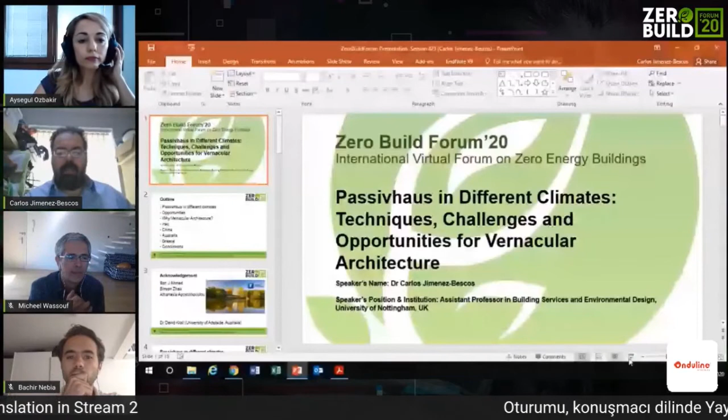Hi, thank you very much, and thank you for the invitation for the talk. So basically, I'm an assistant professor at the University of Nottingham, and this work is... let me redo the screen. Okay, so that should work better, hopefully.

Like I was saying, I'm an assistant professor in building services and environmental design. What I'm going to be showing you is talking about passive house in different climates, looking at the challenges and the opportunities that we can apply due to vernacular architecture. So to give an outline: we will talk about the different issues that could happen in different climates, what are the opportunities, why to focus on vernacular architecture, and I will talk about 3 projects that I work with in Iraq, in China and Australia, and in Greece.

Obviously this work is thanks to my students and a very good collaborator. So thank you to Bang, Binjan, and Nasia, and Dr. David Kroll at the University of Adelaide, with whom we worked together in UK and in Australia.

We understand that passive house has been very well developed in cold climates, in continental climates, and we all know about it and are very happy about how it works. But obviously now we are expanding more and more, looking into other climates. In the United Kingdom we get some issues with overheating, even though we don't have that much sunshine and heat. But suddenly we are moving to other places that are hot and humid, and there are different issues to deal with.

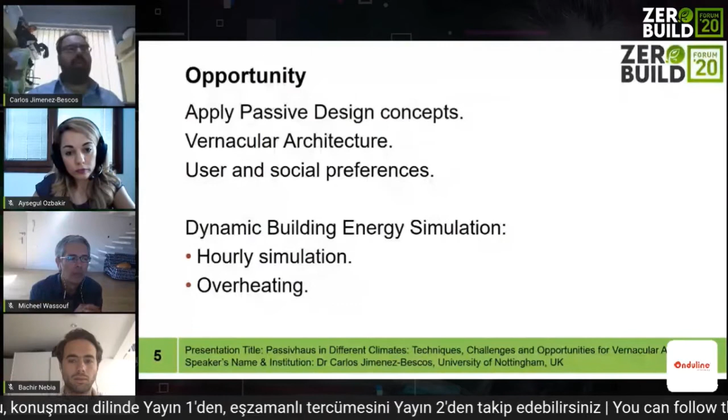The other opportunity that we get is actually moving from the kind of modeling that we do in PHPP, where we are based on monthly weather data and monthly energy, which, to be fair, is really accurate. But when we come into looking at issues of overheating, we need to have perhaps much more detail. And that's where using dynamic building energy simulation allows you to have hourly modeling, which we understand obviously is not for everybody, but it can open very good opportunities.

So why do vernacular architecture? Well, building has been around for thousands of years. We always had shelter, and they evolved through a process of trial and error. And this has been the way that a lot of the technologies we use nowadays came about. We learn from it, so there is quite an opportunity there to learn why things work and how we can apply it.

The other thing, obviously, is that it's quite environmentally friendly because we tend to use passive approaches. I mean, air conditioning is very much available now - perhaps 10 or 15 years ago it certainly wasn't the case in South Spain. And the other thing is that we get people to actually be able to enjoy better where they live because they have that cultural connection. So we start to talk quite a lot about what is a house and what is a home, and that kind of feeling that you can get.

So there are obviously quite a lot of examples in the literature, and as well, courtyard houses are found all across the world in different countries, and they tend to save energy. They tend to provide a different aspect that, more importantly, has a social value.

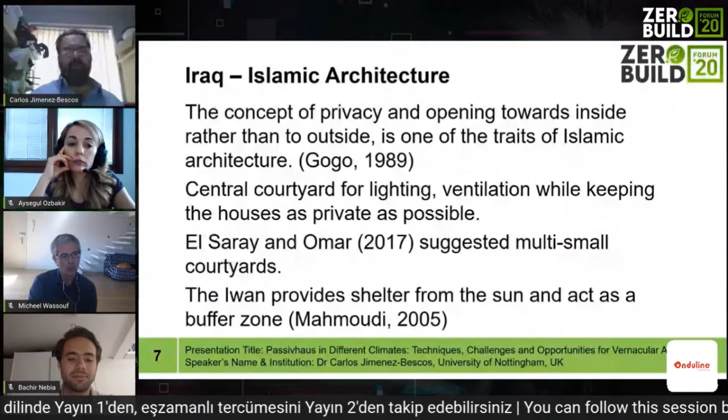So in this case, what we did is all the work was actually done through Design PH and PHPP, and we started to look at what kind of features of the Islamic architecture we could be actually implementing, and what kind of benefits we could be getting.

So we have a base model in which there was a small courtyard, and from that we start to input an Iwan and to be able to see, okay, what is going to be the difference. At the moment, we can see there is only one building, and this is some of the factors as well that we were taking into account, because in reality, this is actually based on houses in the Kurdistan area where you only have one facade that is external. So everything else, you are basically surrounded.

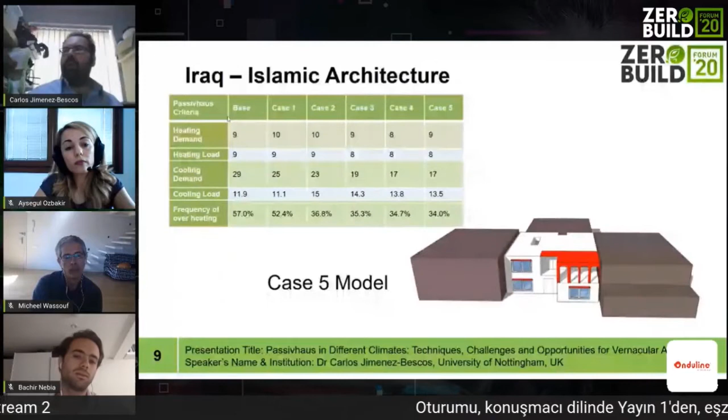So we can see from the results that we were doing, we have a base model and we have 5 different cases.

Obviously, we try to control the cooling load and the frequency of overheating. We are trying to get our cooling load below 15 for the Passivhaus standard, but our overheating was completely above the 10% that is expected. We can see some progression though—by getting shading with the Iwan and working with the courtyard, we managed to reduce it to closer values. Obviously there is more work to be done, but we are talking about initial stages.

Probably things to look at here are increasing the number of courtyards. So instead of just having one, even if small, perhaps placing them in different locations and seeing how we can create some ventilation. Obviously ventilation is great, but if you've got hot weather outside, there is nothing that's going to help you. So it's not a simple answer.

In terms of looking at China, we were looking at the Huizhou architecture. The use of vernacular architecture has already been used by Ouyang, not just for the culture, but actually for the thermal capacity that you could be using. What they were looking at as well is trying to implement some of the learning from vernacular architecture into the retrofitting of this building.

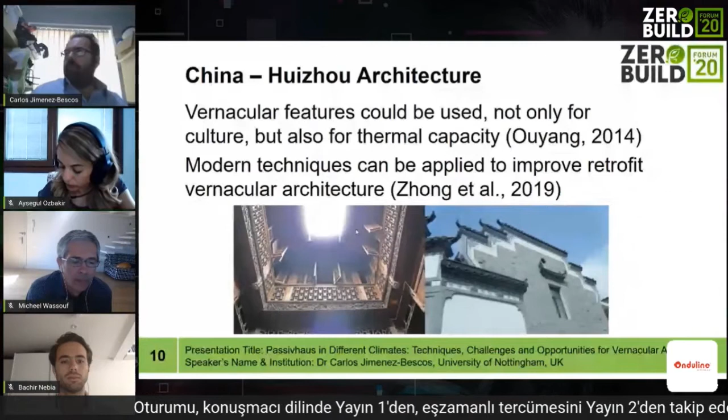In this case, there were four factors that we were looking into: the courtyards, the floor to ceiling height—probably this is more about the principle that if we look at vernacular architecture, we tend to have very high ceilings, because hot air normally rises. So that's the principle, to try to get the hot air to the top and be able to let it go out.

And the use of traditional materials—this has a lot of implications, more importantly from the point of view of embodied carbon. So it's a very sustainable way to try to use the materials that you are surrounded by.

The other factor is the wall finishing colors that we use. For example, in an area where we paint all the villages white, we always get the comment that they look beautiful, but it's not for being beautiful—it's actually to reflect the amount of solar gains that we normally get. So these are all small things that can add up to saving energy.

Here I will only show you some aspects of a comparison between a Model A, which would be a building according to current Chinese regulations, and a comparison to a building from vernacular architecture in the area. To be honest, there weren't so many changes.

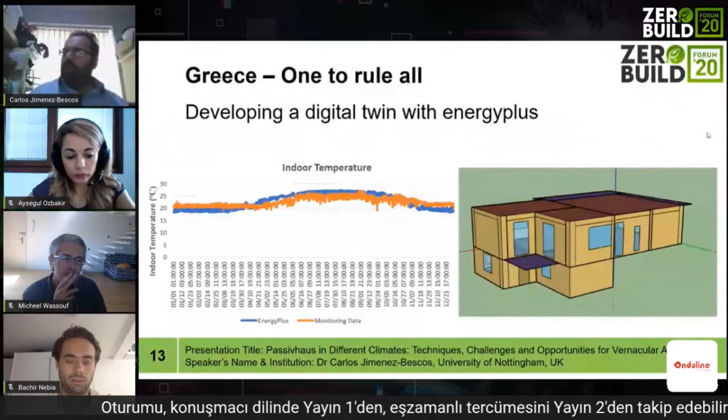So now we move to a different project. This is a Passivhaus in Greece, and this has been modeled using EnergyPlus, a dynamic building energy simulation software, based on hour to hour data. This brings a different approach. I hope most people will be familiar with the term digital twin—basically a digital twin is about creating a model in a computer, thinking about how it's going to be working in reality.

Well, as I was saying before, you build your building that hopefully is similar to what you model, but then you bring people, so the building is going to be used probably in a different way. So what we did in this case was actually closely work with the people that were using the building and really model the building according to the way that they were living.

On top of that, we were very lucky that there is actually monitoring data for this building. So what we have here is on the right-hand side, a representation of the modeling in Energy Plus. On the left-hand side is a graph comparing the red-orange line, the actual data hour by hour that was measured for the building, and the blue line that is our simulation. It's under 5%, which is really a good accuracy that we are getting. This allows us to do a lot of things.

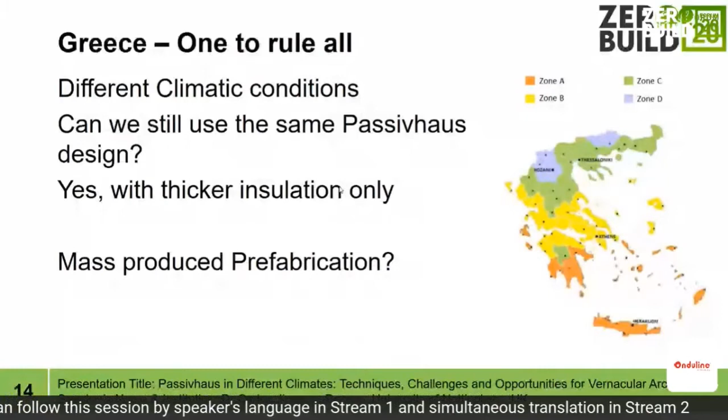And I think the final part that I would like to talk about is a little bit about a sociotechnical approach in Australia, where I worked with David Kroll and some colleagues. We were looking at trying to do affordable social housing that could be deployed for the masses, using a Passivhaus system. But if we go to Australia and try to put a compact form that would be perfect for the form factor, this is not going to work, because they don't live like that.

So we needed to actually implement how we can make a passive house design, that we can get it approved, but at the same time that people want to live there. And I think that's quite the point - we need to be designing places for people to live, not places just to be efficient.

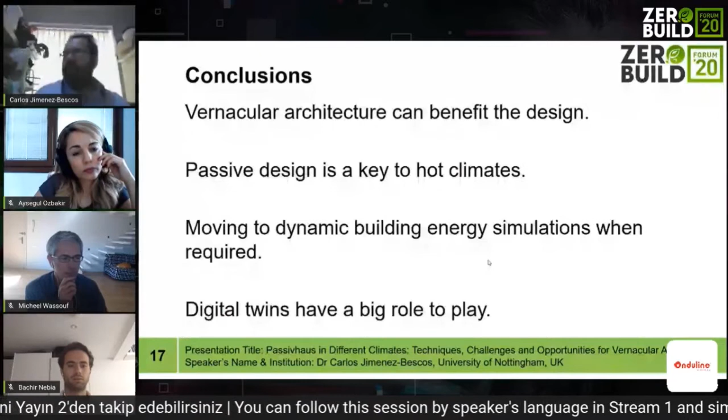Some references that I hope you can get from the presentation, if you want to take a look at some of those papers. And thank you so much.

Sorry, you are on mute. Your microphone is mute. Can you hear me now? Yeah, now it's okay? Yeah, perfect. Okay, well, I don't know what happened. Well, anyways, I will repeat.

So thanks for the presentation, it was really great to hear the cases around the world, and I guess we'll have really great questions afterwards, so we'll speak more about that. Now I would like to switch to Micheel Wassouf.

Now you can hear me, right? Hello, can you hear me? Yes, I can hear, yes.

Great, thank you. Micheel Wassouf is a pioneer architect in teaching passive house design strategies for hot climates, and adapting passive houses and nearly zero energy buildings standard for Mediterranean and hot climates. Again, similar topics, I believe. He participates as an international expert in several EU-funded projects for implementing energy efficiency and research in Mexican housing programs. So we would like to hear his presentation today. Please welcome.

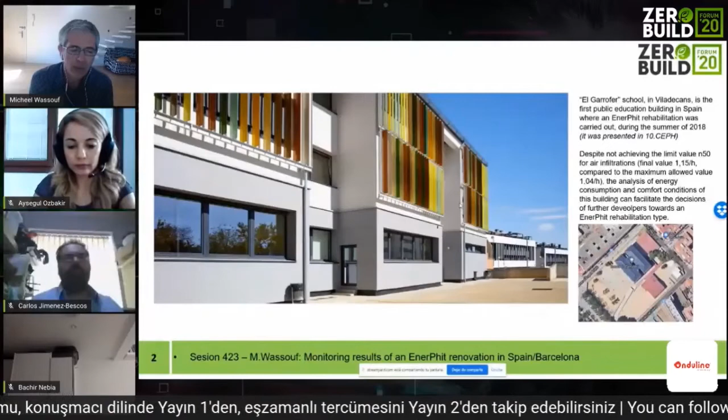So thank you very much. A warm merhaba to all the audience from Barcelona, from Spain. And I'm going to explain a project we have where we have done the design. It is a retrofit project close to Barcelona. We had the luck to have the charge here from the municipality of the smaller city close to Barcelona, Viladecans, to do this retrofitting of an existing public school to an EnerPhit standard, that is the Passivhaus variant for existing buildings. So we are here now tackling retrofitting, which is a little bit different, more difficult I suppose, than Carlos said about new construction. So for passive design solutions it's more difficult, of course, because the design is already finished.

We developed an energy audit of different public schools in this region close to Barcelona, and you can see here the main results. What is curious is that all of these public schools in this Mediterranean climate have a quite high heating demand. You can see it's between 110 and 130 kilowatt hours per square meter a year. That was quite unexpected for us, because we have a quite warm climate.

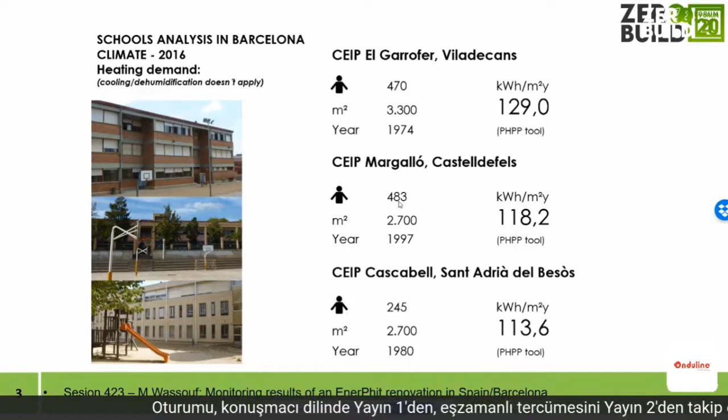These buildings don't have air conditioning, so really what the municipality wanted here is to decrease the heating demand of the building. I can show you here some photos of the building before the retrofit. This building has some severe constructional problems, also comfort complaints of the users, of the pupils, both in winter and in summertime. So before the retrofitting, before the design, we started with the analysis of this public school.

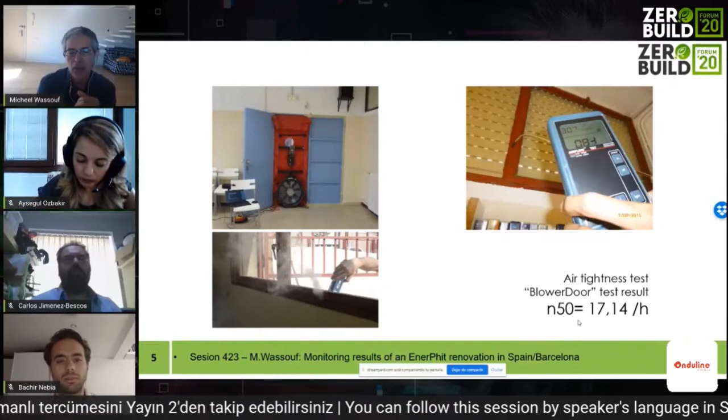We performed, for example, a blower door test to quantify the air infiltrations of this building. And as you see below on the right hand, the result of this blower door test was quite bad. Of course, this kind of building from the 70s in Spain has quite bad performance concerning air tightness. The blower door test had 17 air changes per hour. So for comparison, for a Passivhaus retrofit, this value can't be higher than 1 per hour - so it's like 17 times higher than the Passivhaus value.

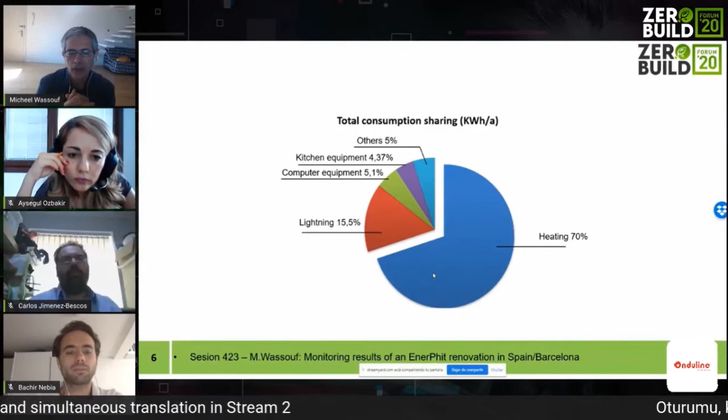Also, we've analyzed the overall energy consumption of the building, and it was quite curious to see that almost 70% of the overall energy consumption of this building was due to heating. So this is quite an important issue for reducing CO2 emissions, also in this kind of climate where these public buildings don't have air conditioning, and most of the energy consumption is due to the heating demand.

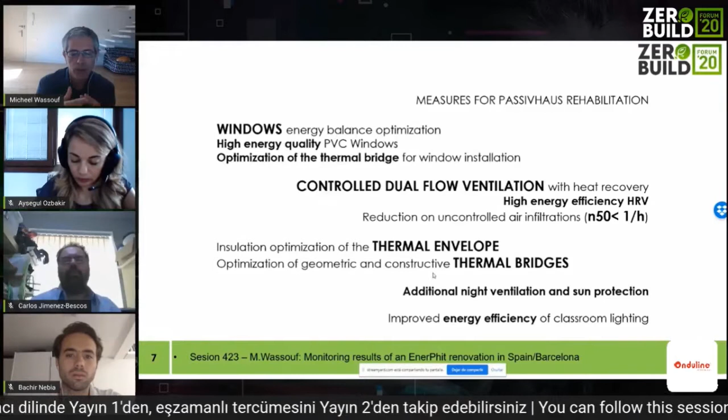Our design strategies were quite simple, based on the 5-6 Passivhaus pillars. We proposed to change the windows and overall insulation, controlling and improving the thermal bridges, also defining an air tightness level, and introducing mechanical ventilation. Also, we worked with natural ventilation at night in summertime.

I will show you some photos quite fast, because I have a lot of analysis of monitoring. I think it's more important to see the results of the real behavior of the building.

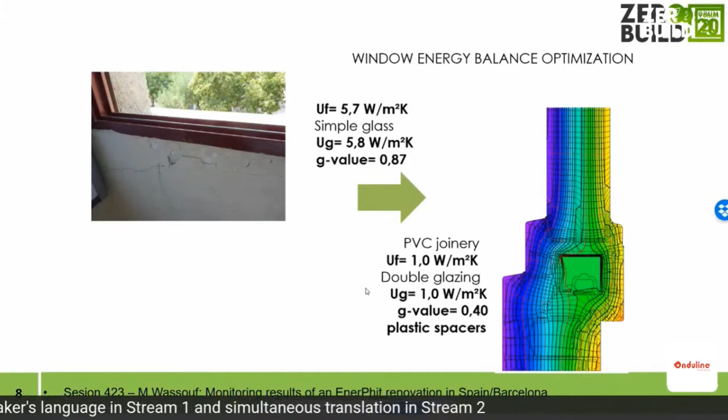Here you can see the U values of the windows before and after the retrofit, and also some thermal bridge calculations. Of course, in this kind of building, it's not so easy to get values similar to new building constructions, because in retrofitting you have a lot of conditions where it's not always possible to get the perfect solutions for a perfect thermal envelope.

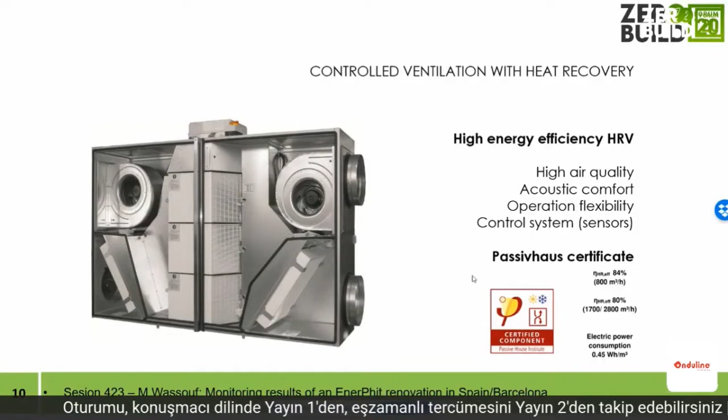Here you can see the mechanical ventilation system which we proposed and which has been installed at the end. It's a Passivhaus certified component. This was important for us, so as to not only control the energy efficiency, but also achieve a very high performance regarding the noise of this kind of buildings.

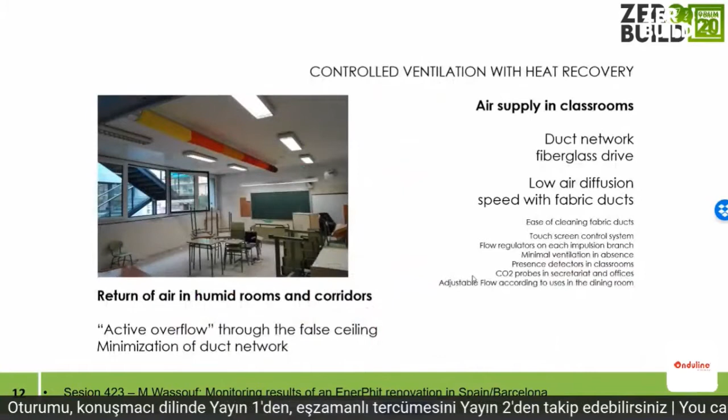Very quick, the design of the mechanical ventilation system of one floor of the building. Some photos from a classroom where you can see we introduced textile ventilation ducts, to have some different and more friendly materials for these buildings.

One of the big challenges and threats of this kind of project is the limited budget for the retrofitting. So probably you have to schedule different retrofitting steps, like a step-by-step methodology.

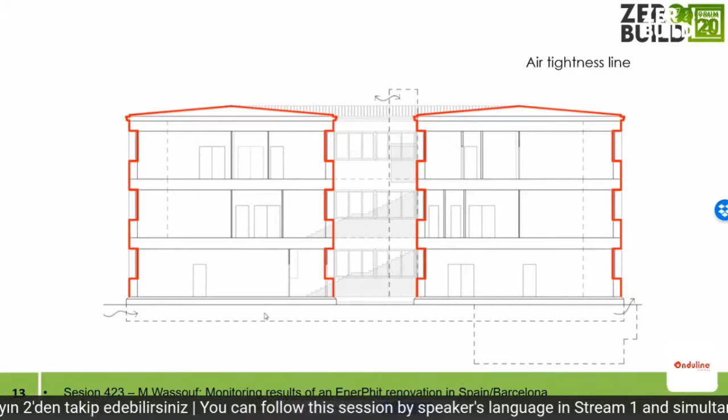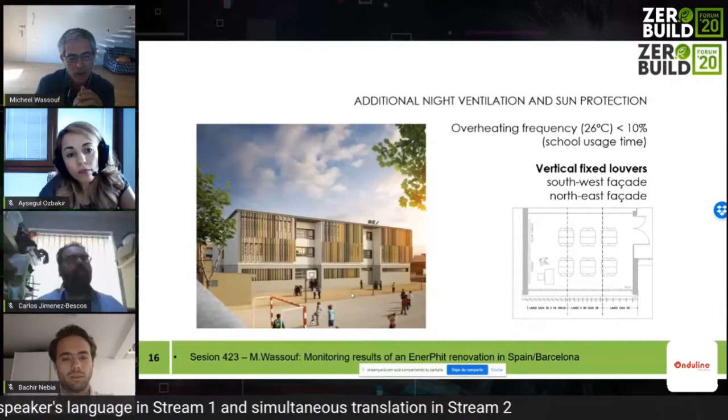We had also introduced movable screen sun protection here, which at the end, for economic reasons, couldn't be possible. So at the end, the building was installed with fixed louvers as fixed sun protection elements.

One strategy here was to change the light bulbs to introduce LED illumination to decrease the electric consumption as well.

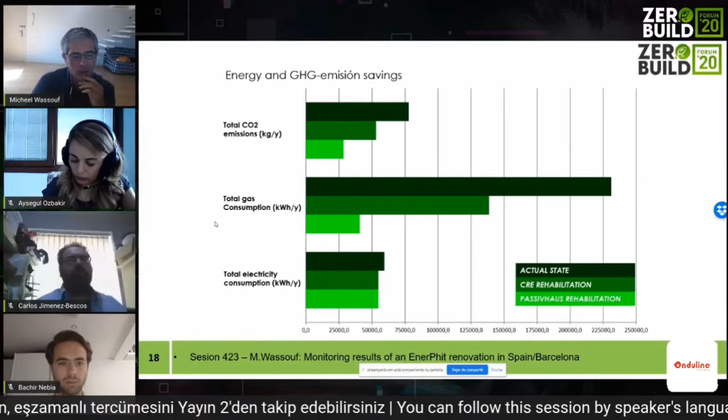The electricity consumption, as you see, theoretically was supposed to be the same after and before the retrofitting, because on one hand we had mechanical ventilation, and on the other hand we had savings driven by the LED illumination.

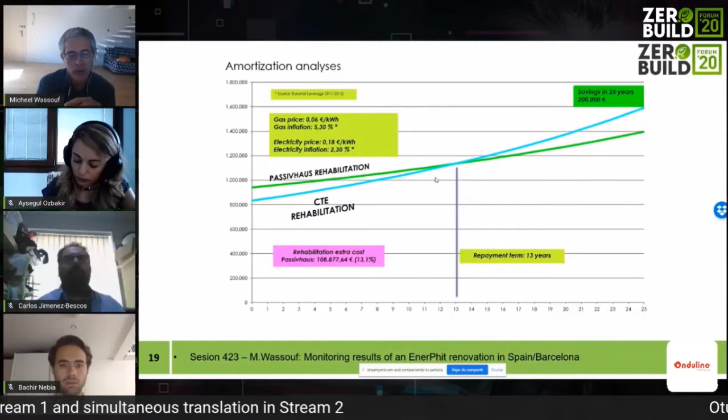Here you can see the calculated repayment time - the amortization of this Passivhaus standard retrofitting has been calculated at 13 years compared to a normal retrofitting conforming to the official legislation norm of the Spanish code.

So you can see also the costs of this retrofitting. At the end, it was more or less 1 million euros, to give you an idea about this cost. Per square meter, we got at the end almost 300 euros per square meter - it's a very low price, I think, for this kind of retrofitting, for 3,000 square meters of floor space.

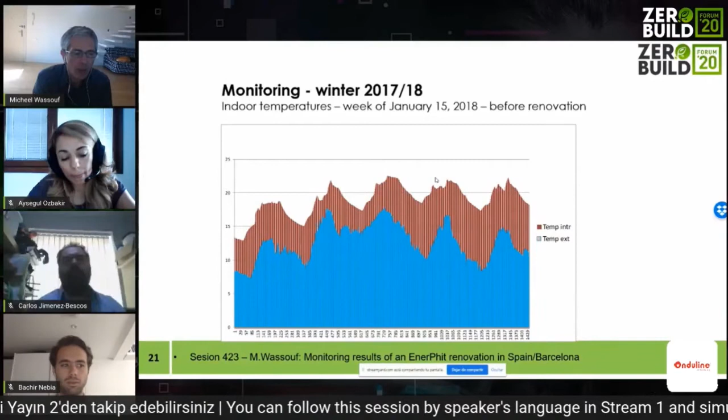Here's a first result of the monitoring before the retrofitting. We monitored the building also before the retrofitting, and you can see a very interesting graph. The blue lines show the outside temperatures over 1 week, and you can see that this week the temperatures dropped to about 7 degrees, and how the interior temperature of this classroom almost performed the same as the exterior temperature.

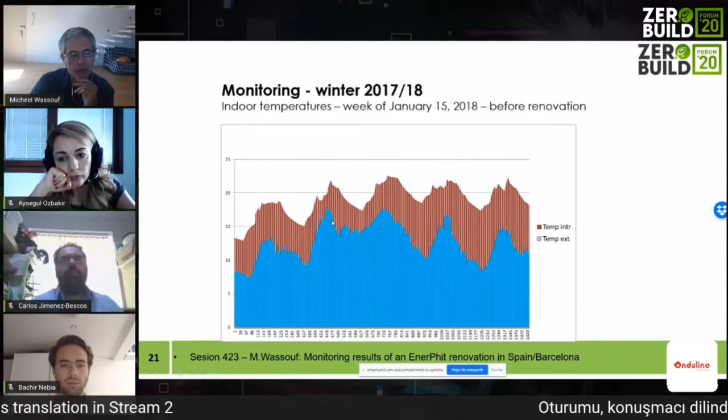This is very typical for a normal building constructed, let's say, in the last century or even in our century, which has a very bad performance regarding the thermal envelope, etc., and passive strategies.

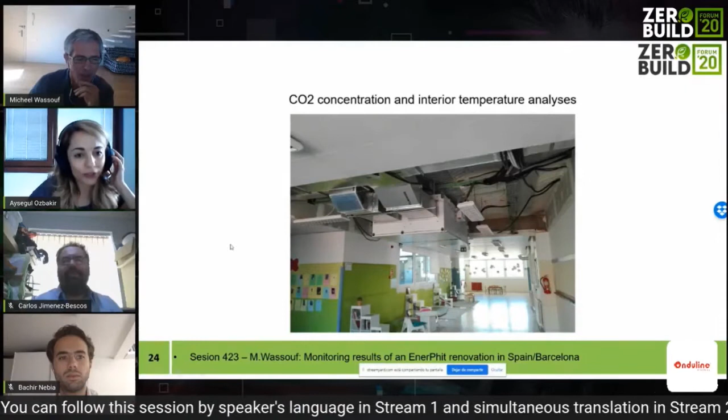I think that is enough to see the results of the monitoring. We wanted to know the CO2 performance of different classrooms. As you might know, CO2 ppm concentration is a very good way to know the real indoor air quality of our buildings.

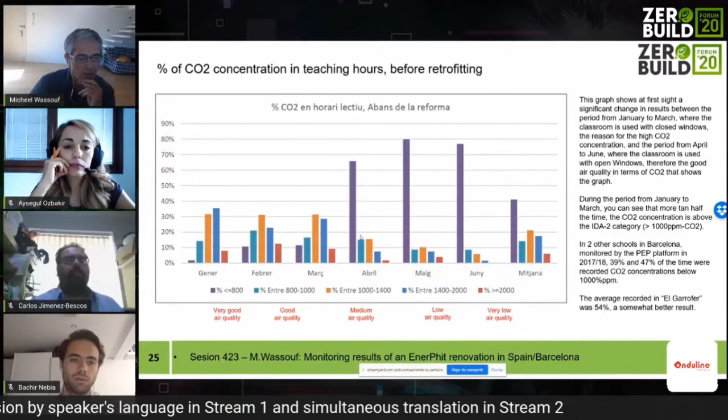You can see very easily that starting from April, the beginning of spring and summer, the pupils start to open the windows, and therefore the CO2 concentration dropped down. In these summer months, there are no problems or issues about the CO2 concentration.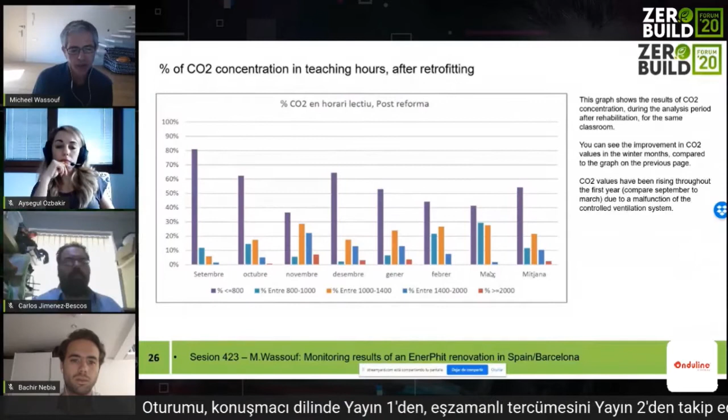If we compare it with the values after the retrofit, monitoring started in September of last year and unfortunately finished in March of this year due to the COVID crisis. The school from March on has been empty, so unfortunately we don't have the values for the summertime. You can see that the CO2 concentration is quite clearly better than the values before the retrofitting. We have an average of about 50 to 60% of the time below 800 ppm of CO2.

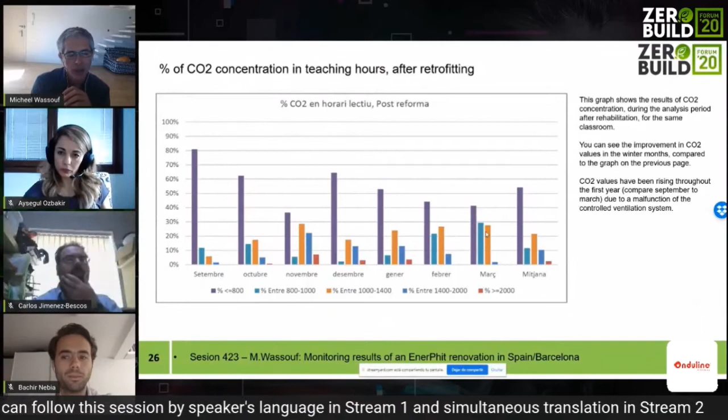It's certain that this building suffered some problems on commissioning. This is an overall problem in Spain, that smaller municipalities don't have the maintenance departments prepared for this kind of newer buildings. So the ventilation system in this retrofitting project suffered some operation mode changes, and actually till now this is still the first year of trying to improve the performance of the ventilation system due to technical reasons.

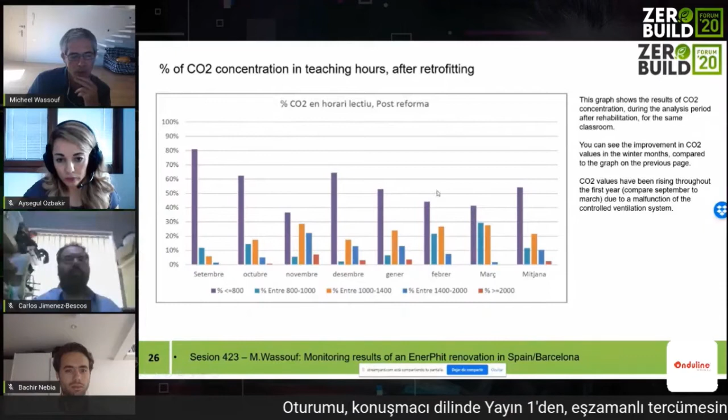So curiously, at the first months of performance, the CO2 values were quite very good, and then it decreased a little bit due to some technical problems with the installation of these machines.

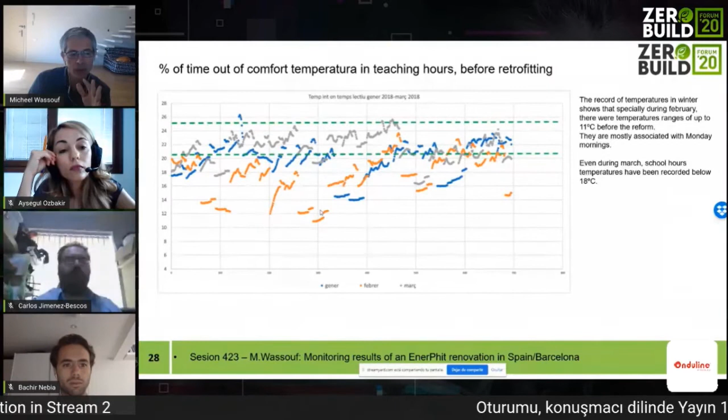You have to remember that we are here in this building about 1 kilometer from the coast, so it's a real Mediterranean climate. Don't think about schools in the mountains in Spain or in Catalonia, which I think should be much worse than this building.

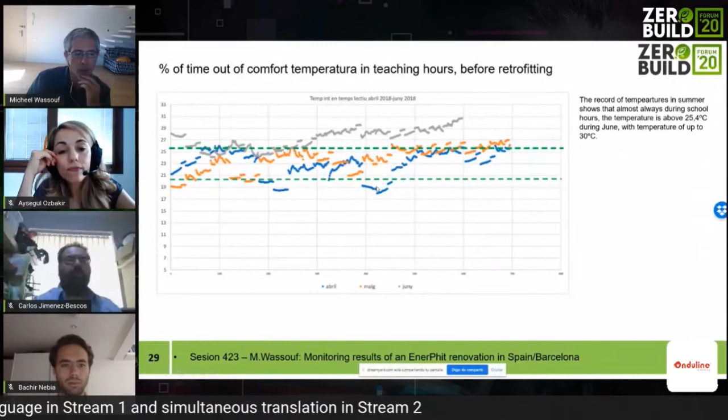And if we go to summertime, we have a quite good performance in April and May. In spring, I think these buildings perform quite well. The problem really is in wintertime and in real summertime.

So the advantage here is that in summertime, of course, the school is closed from July till the beginning of September. Anyway, in the 3 weeks of June, we had temperatures reaching till 30 degrees inside.

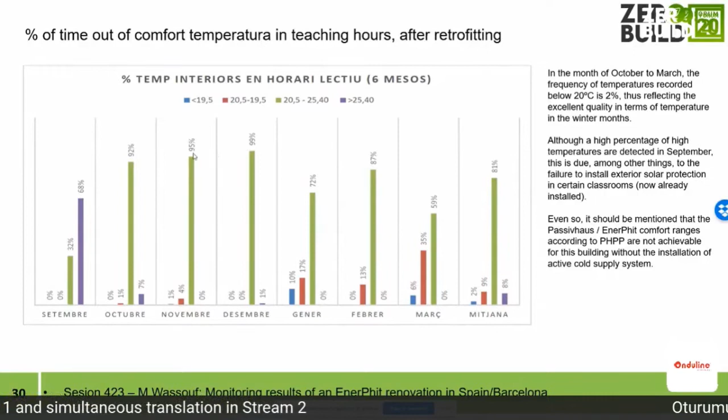So if we go to the values after the retrofitting, we can see that the green bar is between 20 and 25 degrees of temperature - so the green bars are inside the comfort values. That's true, you can see there's quite very good performance of the building.

Of course, this was not surprising because we know that passive houses perform quite well in winter time. There have been some issues in September.

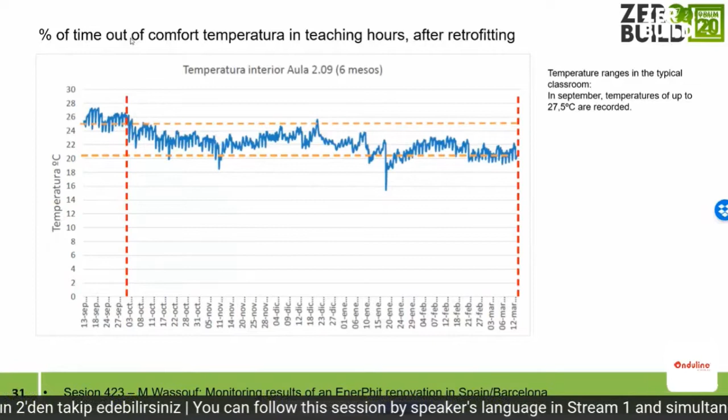When we go to this graph, which shows the linear development of the temperatures, we can see that in September this building had higher temperatures, reaching up to 27 degrees, but they were still below, or let's say better, than the performance before the retrofitting.

Also, there are some issues concerning relative humidity, but this is a general problem in the Mediterranean area, where the month of September is characterized by very high relative and absolute humidities, reaching almost 80%. This is also due to the very high exterior temperature.

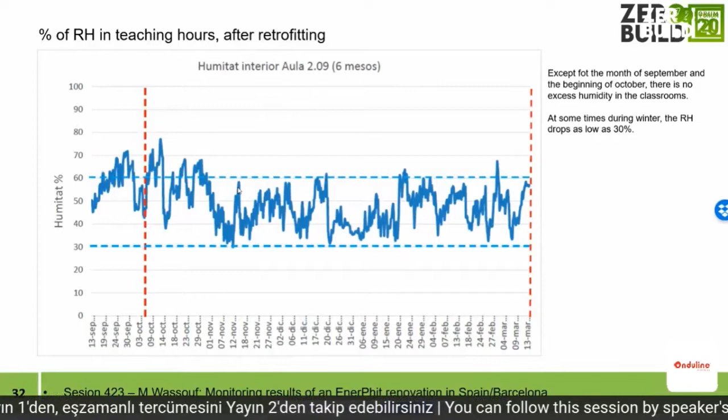I have to say that Passivhaus is based on the ISO 7730. So if we want to certify these kinds of buildings, we have to implement an active cooling system also, because the PHPP calculations already showed us that the summer performance is not good enough to be inside the ISO 7730 norm.

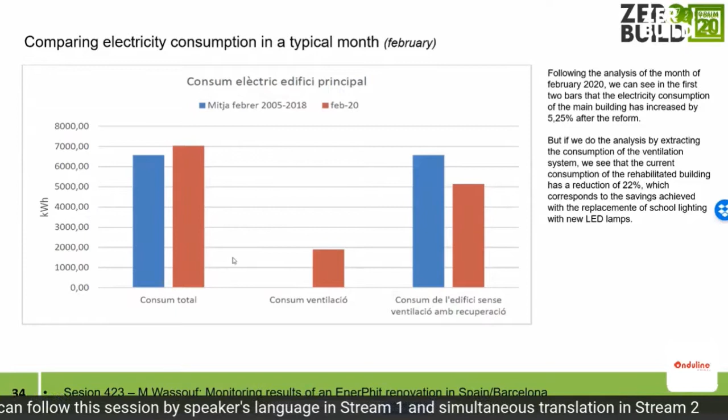This is the electric consumption in the typical month of February. We see that we have a light increase in electric consumption. This is due, as I said before, to the mechanical ventilation. Therefore, it's very important to install very high performance mechanical ventilation, so we normally tend to install a Passivhaus certified machine, where we know the performance is quite high.

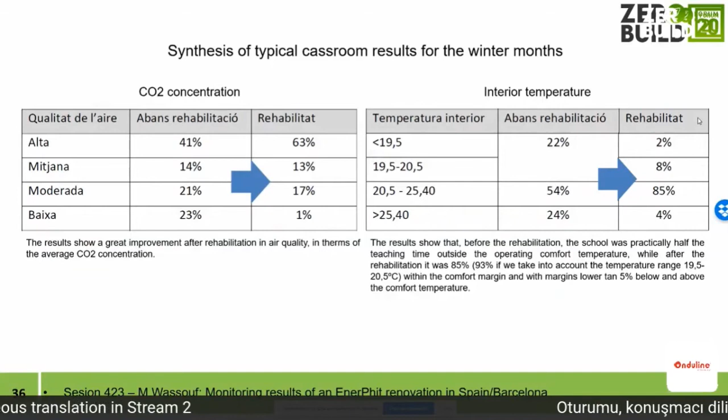Thank you, Wassouf. It was really great to speak with the numbers, actually. And I have some questions later on.

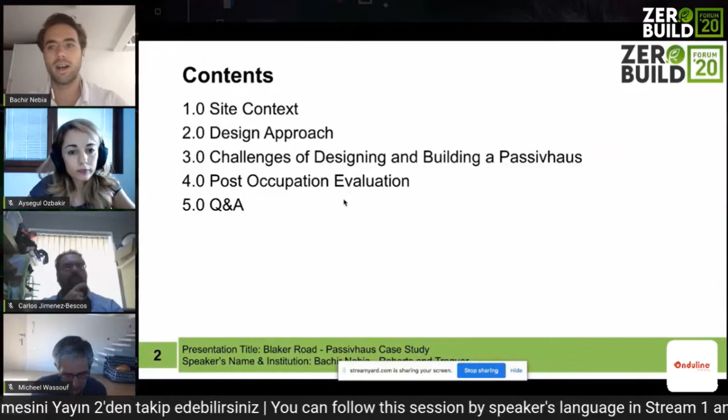So I'm just going to present Blaker Road, a scheme designed to Passivhaus standard in London. I'm presenting it from an architectural point of view, but mainly for an architect that works for the clients - we are the developer and the client on this project. We designed it, built it ourselves, and sold it. I'll firstly talk about the site context, the design approach briefly, and the challenges of designing and building a passive house, mainly from a developer and architect perspective.

That's something not usually covered when we talk about passive houses - what are the challenges for a client if they wanted to deliver a passive house and sell it on an open market? Finally, we'll talk about post-occupation evaluation, just to see how the project is performing at the moment.

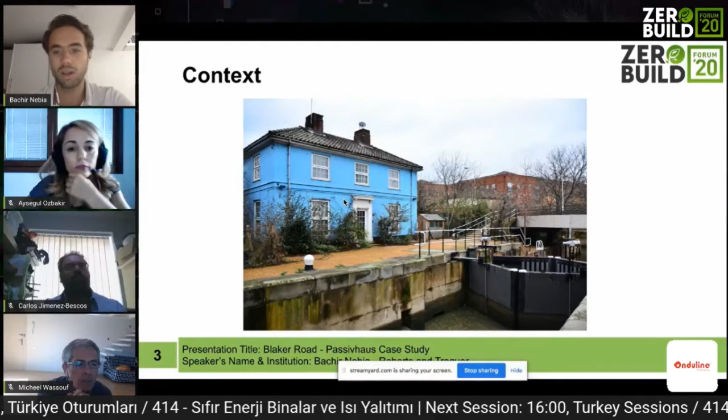So that's the site as it was previously. It's a very challenging site because it's an island - a man-made island around two rivers - and that is the old lock keeper's house. Someone lived there taking care of the locks and making sure they were maintained. We bought the site back in 2014, and went through the planning process and design process, really understanding how we could do something on such a small, challenging site with very limited access.

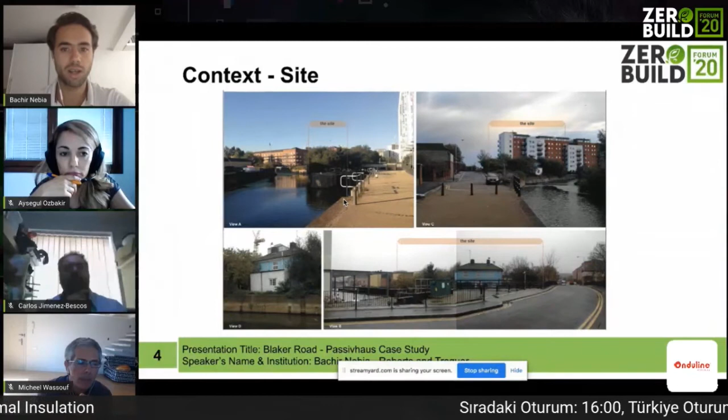You can see here a few pictures of the site as it was previously - the house in the middle, and a small bridge crossing the man-made island. The site is very rich in history. I'm not going to spend a long time on this, but hopefully it gives you a bit of background on why we've designed the current buildings the way they are.

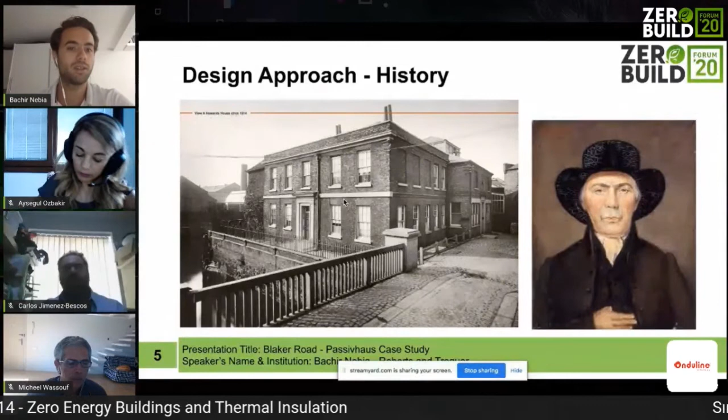The island's been there for a very long time. It changed a few times, but there was a house there in the late 18th century, and someone called Luke Howard was living there. He was a famous scientist, and he's actually the one that named the clouds - he was studying clouds and climate, and gave the different names of the clouds that we know now.

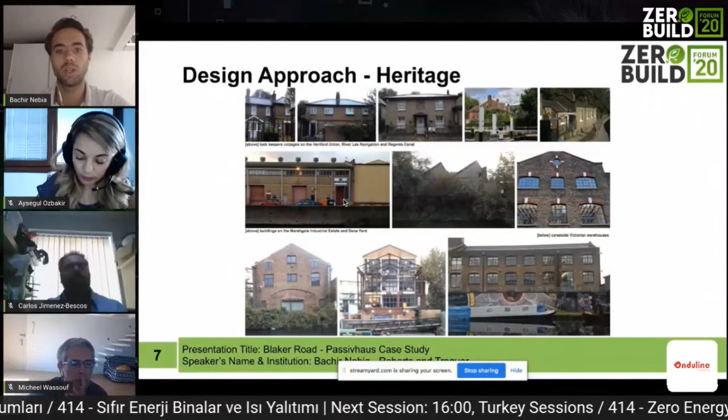We started trying to find inspiration from that house and see how we could use that story in our site. Also, the surrounding areas are very industrial - Stratford used to be a very industrial site, with a lot of warehouses around, docks, and rivers - and we also tried to include that in our design.

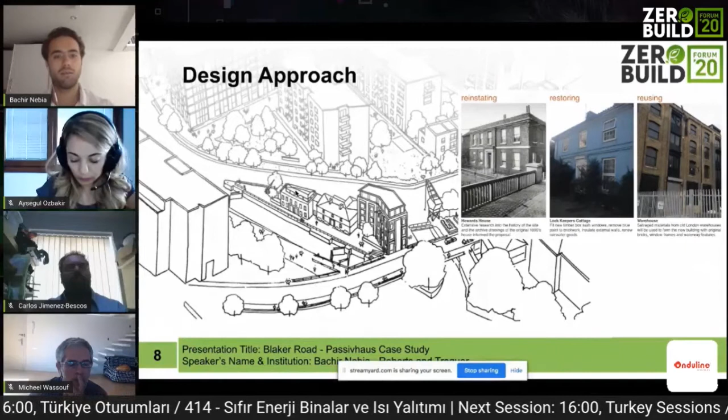So as an overview of how we started the design: we kept the house in the middle, tried to reinstate the Howard's house, and tried to put a warehouse on the other side. So you can see it's two houses built to passive house standard, one retrofit, and a block of five flats.

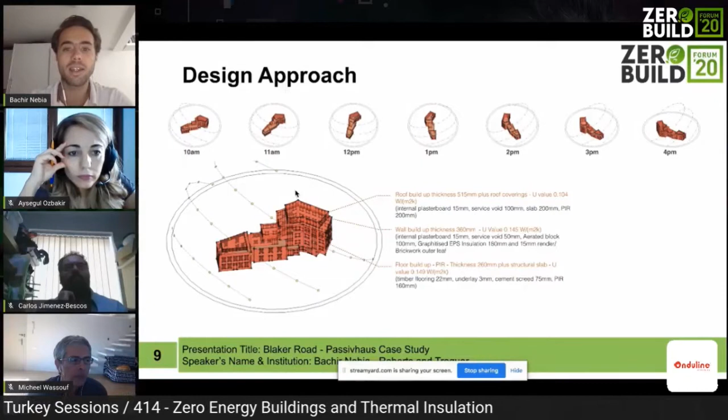From there, we started really working on the passive house design - understanding the daylight, the impact of the climate, the initial U-values we needed to target, and really working with the PHPP to see at early design stages, before planning, whether it was going to be feasible or not. So that's how we hoped it would look, at planning stage, and we then took it forward.

Once we got planning, I think the main challenge for a developer is really cost and being able to make money at the end of the job. One of the main challenges, especially at early design stages, is really understanding the design cost.

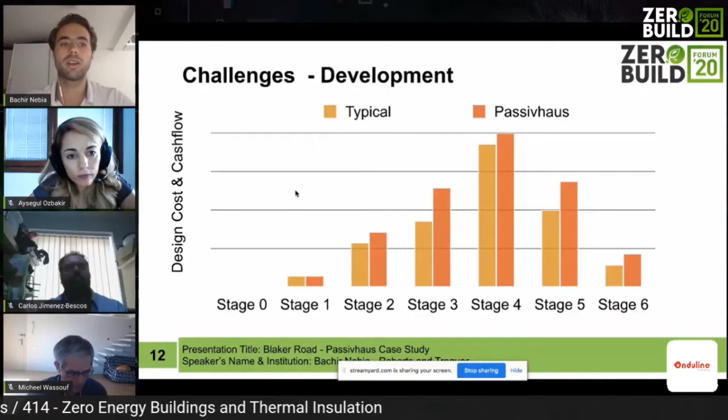What is the cost of the design and the cash flow? So that's all shown at the bottom, all the RIBA stages. Stage 3 is usually where you apply for planning, submit it, and get it before you build. So anything spent before that is a cost at risk - anything you spend before planning is a cost at risk.

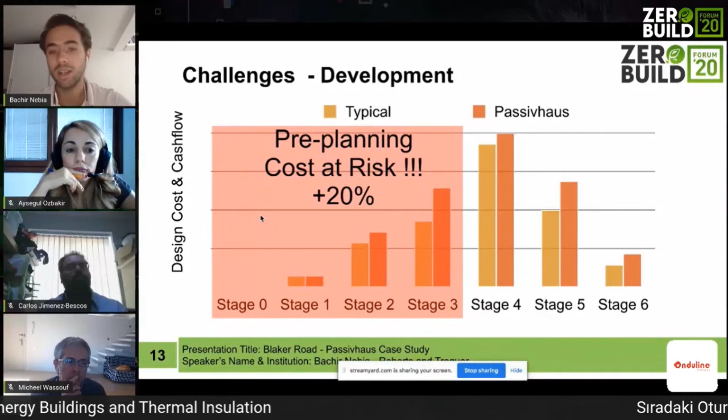So you can see that to deliver a passive house, it's about 20% more at early stages in terms of design, because you need a passive house consultant, because you need more time in daylighting, because you need specific advice, and you need to run early PHPP models to make sure you can actually deliver it before you commit to it. So any cost before stage 3 is at risk - if they don't get planning, they've actually spent 20% more on just design cost, just to submit planning. That is a very big challenge for cash flow, and also extra risk for developers.

We move on to the design, post-planning. I'll limit it today to the cladding, because I think the cladding was the most challenging one. So just summarizing what's the basis and what's the main elements of the cladding in terms of Passivhaus.

So we have the weather barrier, the insulation, the structure, and the air barrier. Usually we go from outside to inside, and we started looking at each one of them to see what is the best material to use and what is the best way of designing the cladding.

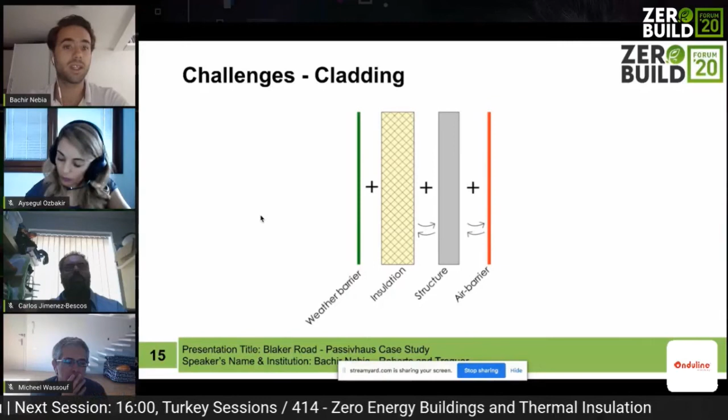So we started with the superstructure, because that's something we were keen on. We were also very well aware of the carbon emission of our building, and we were trying to find something that could sequestrate carbon in our superstructure. So we started with CLT, because CLT is becoming available in the market - it's easy to use.

For our sites, it was quite good because we were building on an island, so we needed to build light. CLT is about 40% lighter than concrete structures. It's 3 times quicker, there's a big amount of carbon storage, and the big advantage is that it's a superstructure that is airtight - once you've built the CLT structure, you already have a structure that is kind of airtight that will help you achieve the Passivhaus targets.

One of the downsides is that it's about 20% more expensive than concrete, but you kind of win that back in the time of erection of the superstructure. It needs earlier design coordination - about 2-3 months before the erection of the superstructure, you need to be done with your design to send it to a factory somewhere in Austria or Germany, and you get your CLT shipped back 2 months later for the erection. So that's something to bear in mind with CLT.

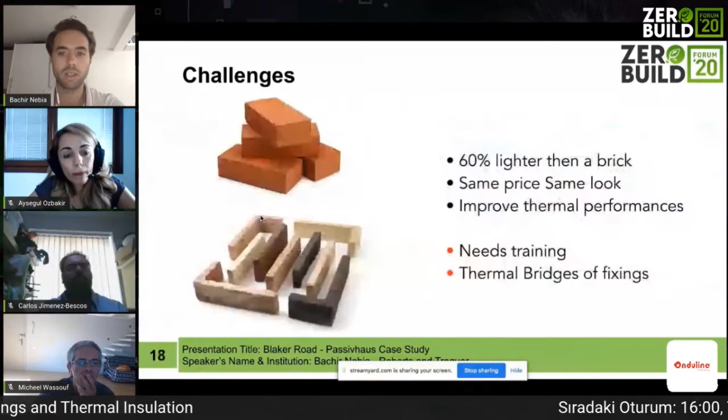The second challenge is obviously what's going outside of that structure. London is very famous for its bricks, and because it was a site with a lot of heritage background - part of the LLDC and post-Olympics master planning - there were a lot of restrictions, and we had to go with bricks. We love bricks anyway, but it's not great in terms of carbon emissions, so we were trying to find ways of making it work with bricks.

So we went from bricks to brick slips, because it's 60% lighter. It looks the same, and it's actually the same price. It improves the thermal performance because it gives you more space to add extra insulation at the back of them.

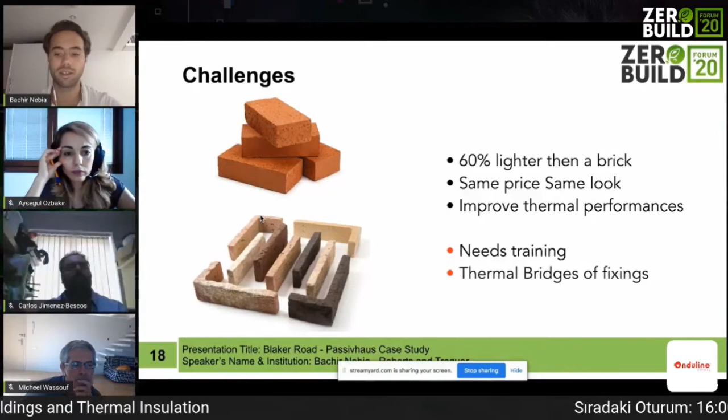However, it needs training, especially for the guys on site. There are a lot of parameters to take into consideration in terms of thermal bridges, because it needs a lot of fixings back to the structure. So that's just a small 3D modelization of how the brick slips are fixed back to the structure, and some samples of the bricks that we've used.

Talking about the overall performance of that cladding, I think one of the biggest challenges is, once you know what you're going to use and the value you're targeting, understanding where I'm going to put my insulation, where I'm going to put my air tightness layer, and most importantly, how I'm going to control the condensation with the thermal bridges I'm going to have, making sure that I am actually delivering the design intent we wanted from the beginning.

So we looked at different options, and we've run some thermal bridge analysis, and the most important thing is understanding the dew point for the condensation.

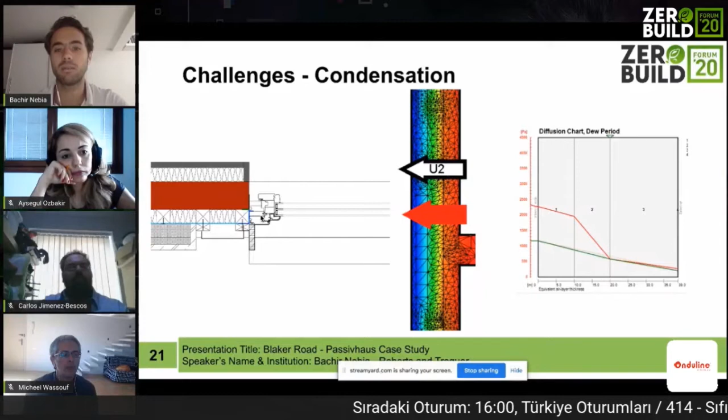So we've run a few examples, and a few of them show condensation inside the cladding, and that's a big challenge, especially in the UK, due to the cold and sometimes humid climate. Condensation is a big issue, and you need to make sure you design out any risk of it, especially on timber cladding, because interstitial condensation between the insulation and the cladding can affect the structure. We've run a few options, and I'm flagging it because it's something important to design for from the beginning.

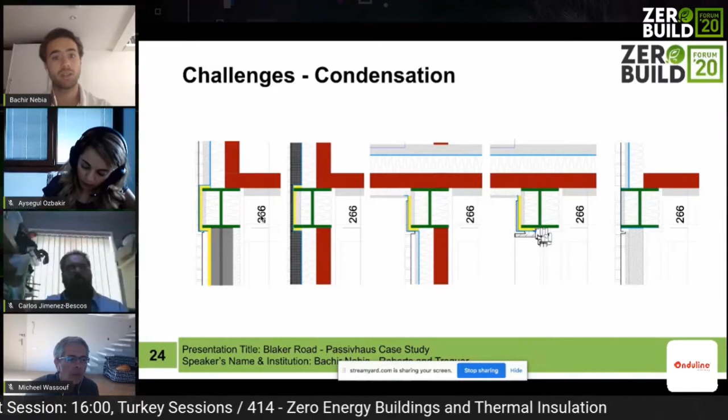You also have a few challenges in terms of condensation. We had an area that was cantilevered, and we had to introduce a few steel columns and beams. Steel is a very cold material, and we had to insulate it, but we had very limited space, so we introduced aerogel insulation that is highly performant and could deal with the thermal bridges around the steel, making sure there's no condensation and very limited thermal bridging.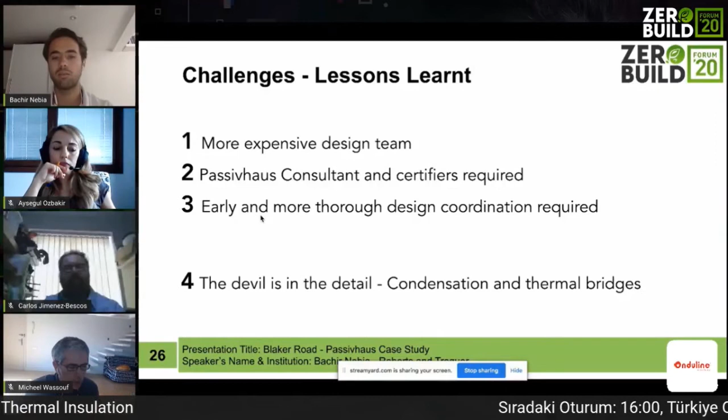So just a quick summary on this first part, the lessons learned. On a passive house, usually you have a more expensive design team. Passive house consultants and certifiers are required, and they are very useful. Early and more thorough design coordination is required, so you need to start designing things earlier and very precisely. And the last one is really that the devil is in the detail, especially with condensation and thermal bridges. Usually, from a design process perspective, you don't get to that detail at the beginning and people aren't used to it, so you have to push the design team to reach that level of detail early to make sure you're covering it.

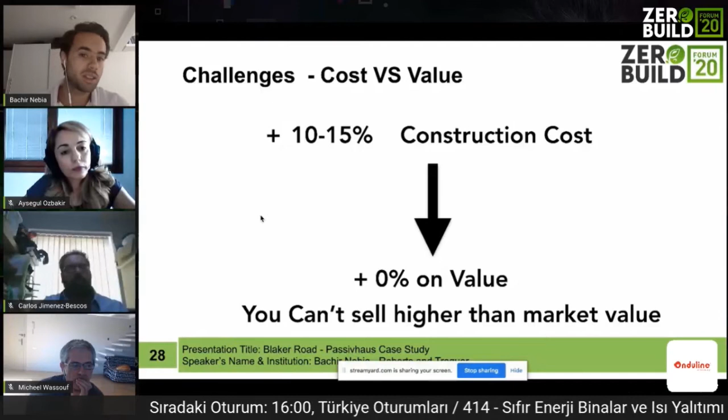Another challenge I wanted to cover today is cost against value - what is the cost of delivering things, and what is the value at the end? From a developer perspective, to build a passive house you usually need 10 to 15% on top of the usual construction cost. But the reality is the market does not pay for that 15%. So when you sell the house or flat, you're not going to sell it higher than market value, or if you're lucky, maybe 3 to 5% higher. So you're not going to make that money back, and you're going to cut from your margin, which is obviously not acceptable for a lot of developers.

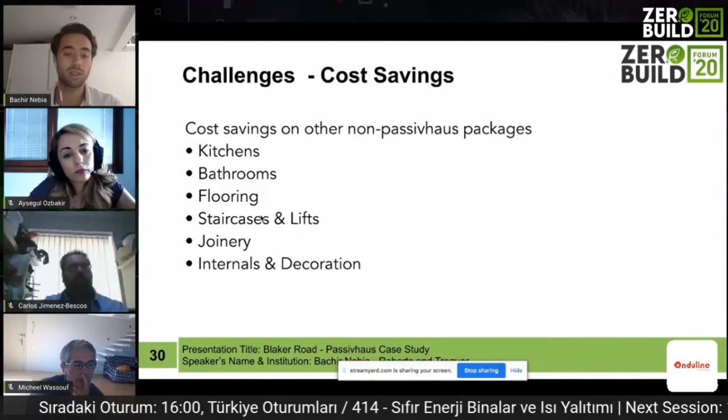We've done it because we believe in it, but we also had to be smart in other ways to save cost and maintain our margins. And that's very frustrating, especially for architects - finding cost savings. So anything not related to passive house, all the packages that aren't passive house, we needed to be smart in design. We needed to cut costs and deliver something that still looks beautiful but is cheaper. So we targeted the kitchens, the bathrooms, the flooring, staircases, lifts, joinery, internals and decorations - all those packages needed to be cheaper to make up for that extra 10%.

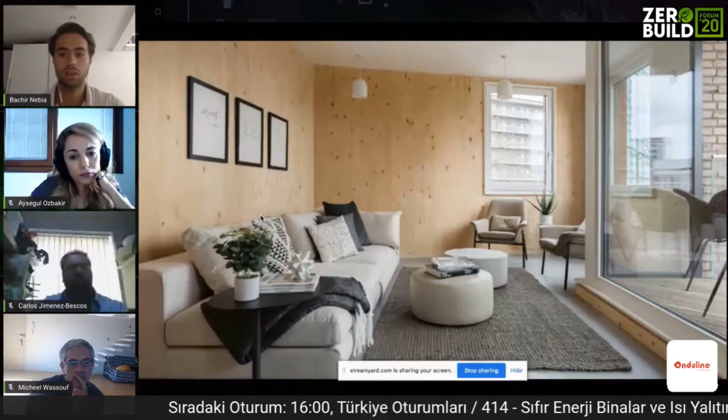So you can see here a few pictures of how it looks inside. All the internals are exposed CLT, which saves us cost. The flooring is marmoleum, a natural product that's also cheaper and easier to install. The kitchens are very simple but well designed, with cheaper tiles and very simple design where we can save cost, and the same for the bathrooms. So those are a few examples where we had to design them right, but at cheaper cost.

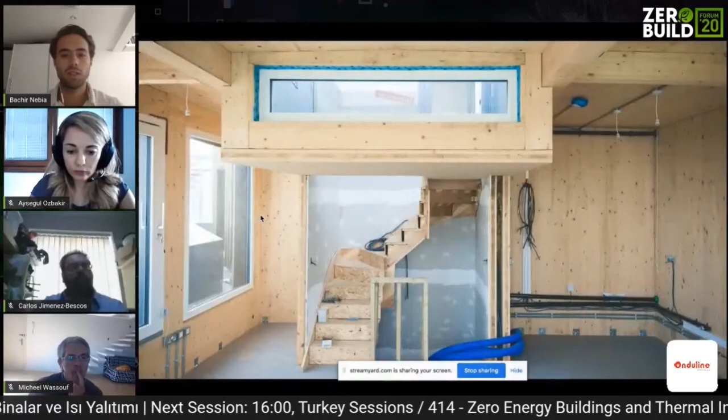In terms of construction, I'm going to focus on just a few points. Here are a few pictures of the site during construction. I think the biggest challenge is workmanship - builders aren't used to Passivhaus, and the different trades around you aren't used to building it, or to giving the care it needs. I'm mainly going to focus on airtightness, because that was one of the biggest challenges, especially on the block of flats.

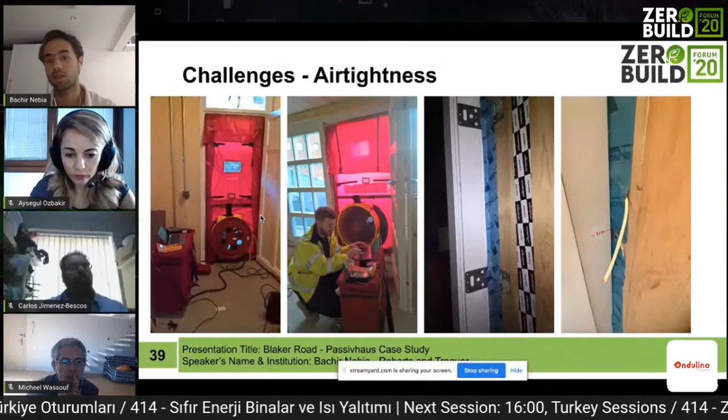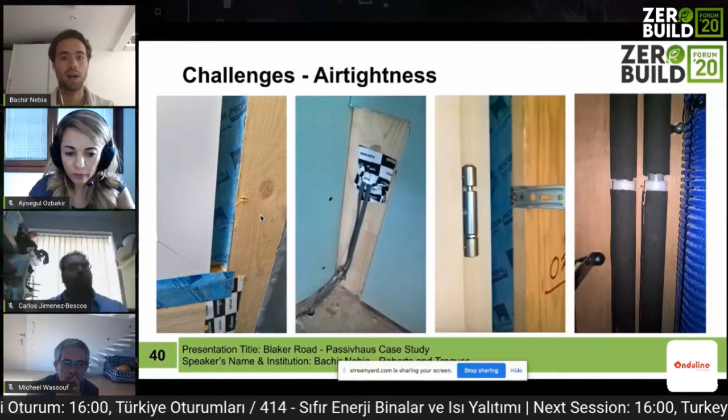So during the airtightness test, you can discover things like tapes over brackets of the windows. Even though the window installers were Passivhaus certified, they can still make mistakes, and that can make you not achieve your airtightness levels. You have cables going through gaps on the window tapes, brackets again, insulation over pipes. They're very small details, but at a Passivhaus scale, they're actually big mistakes, and people make them all the time.

So the lesson learned on this part is really lack of training. The industry lacks a lot of training in terms of building Passivhaus. There is very limited understanding of the Passivhaus requirements when you come to actually building it on site. Airtightness champion on site is a must - you need someone on top of the airtightness throughout the whole process. You need an experienced main contractor, and you need very, very tight cost control.

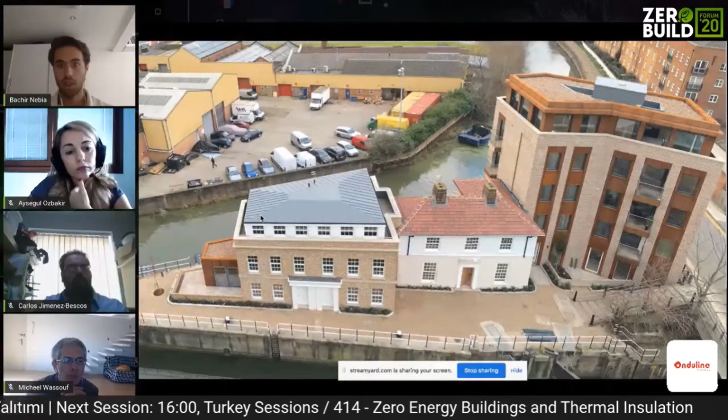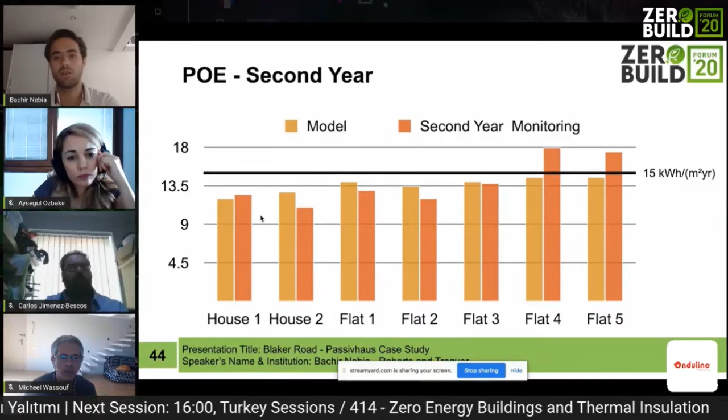But for all the flats and houses that are on top of the 15 kilowatt hours, we need to have a look at them - what is the problem, and how can we fix it? So we've managed to kind of fix it, and we dropped the values down. All of them are below the Passivhaus requirements, which is good news, apart from 2 flats, and we will have a look at why. So flat 4 and flat 5 are on top.

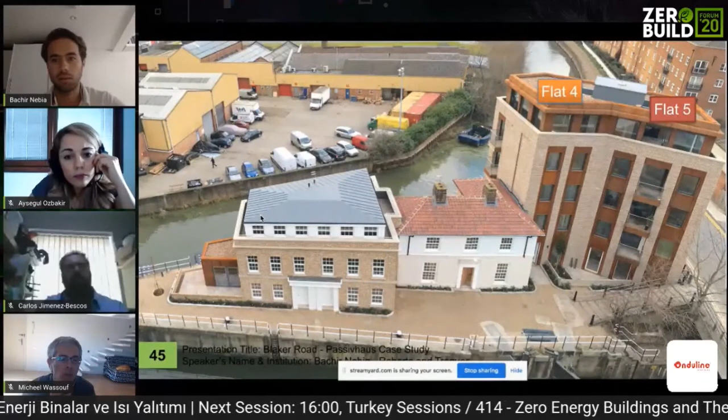Maybe some of you guessed why, but it's a design issue, and it comes to an overheating problem. They're highly glazed, and those are the 2 flats that kind of overheat a lot in the summer, and people tend to use a lot more of the mechanical ventilation, especially at night.

So from a POE perspective, and trying to close that performance gap, I think post-construction what is very important to have a look at and try to rectify during the first year is airtightness defects, because there is always a defect on the airtightness, and MVHR control and adjustments, especially on hot water and heating. So there are always a few adjustments you have to do in how the MVHR works and how it's controlled.

The doors and windows leakage - I think after the settlement of the building, during the first year there is always leakage somewhere on the doors and windows, around the seals, around the frames, that you have to go back to and make sure they're all sealed. The occupants and building users, it does take time sometimes for them to understand how it works, especially if they're not familiar with the Passivhaus scheme.

How they use the MVHR, how they use the heat pump, whether they open or close the window, they have a small radiator, whether they turn it on or off. So it's a learning curve, and it usually takes them 1 to 2 years to understand.

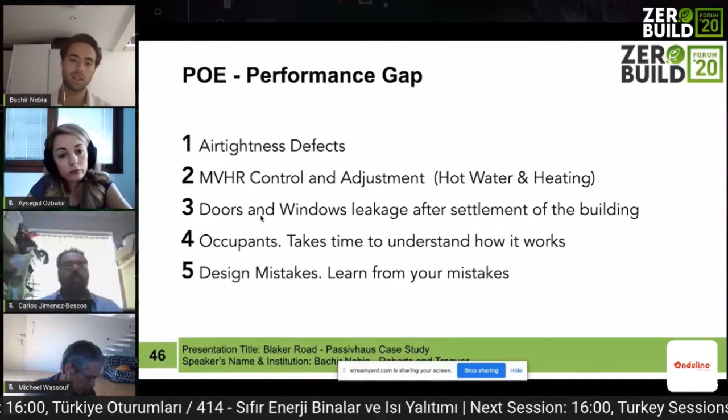And also trying to understand from your design mistakes - really learning from your mistakes, what went wrong at the beginning. Is the PHPP enough? Do you have to do a dynamic simulation, especially for overheating and so on? And yeah, I think I'll keep it to that.